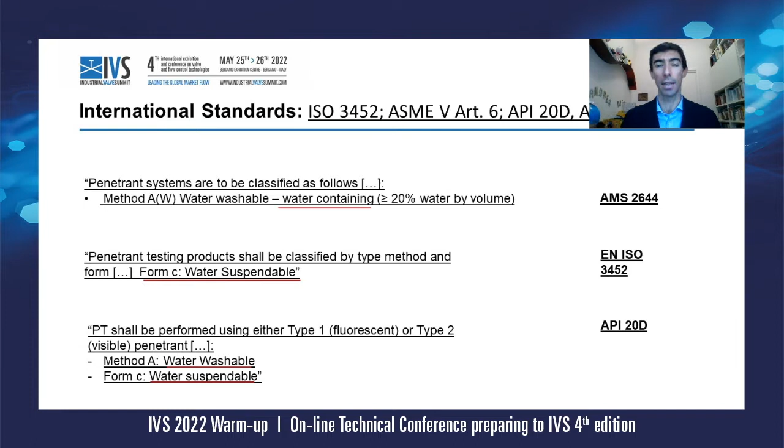Number one, safety advantages. They have no flammability risk. They are not even irritant for the eyes or skin of the operator, and not polluting in any way for the environment. You will see that the safety data sheet and the label are free of any safety indication.

Number two, also very important and appreciated by companies, is 0% volatile organic compounds, which means for you no expensive air treatment with active carbon filtration, and also a safer product for the environment. After the safety advantages, we look at the cost advantages.

Sometimes when we hear bio, we think, yeah, it's a better product, but maybe it's more expensive. No, in this case, bioliquid penetrants are not more expensive to buy, and you also save on the fixed cost of active carbon filtration with solvents, because they are water-based, so you emit no solvent when you spray.

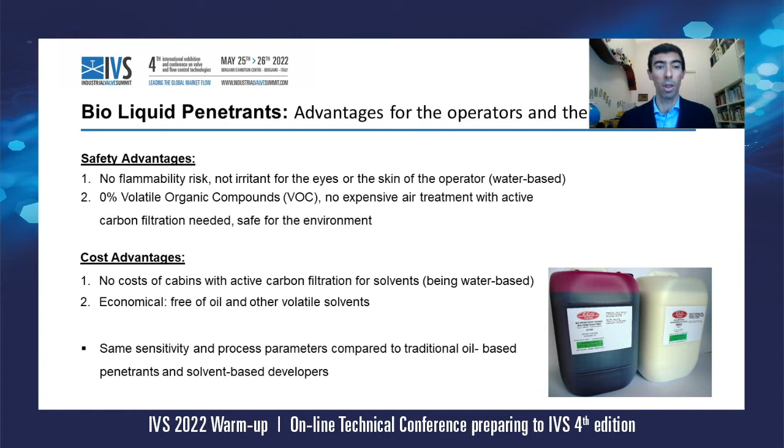This is the big innovation.

So there is no risk of overestimating the size of a crack and maybe throwing away a piece which, by the size of the crack, could be still good for repair or to go further in the production process.

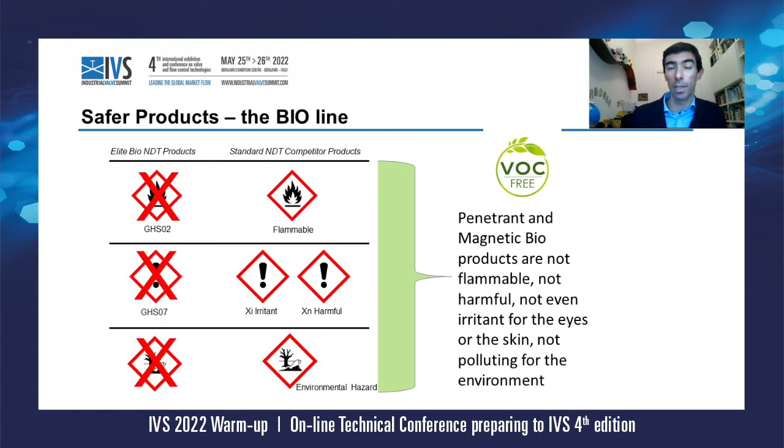So as we've seen, volatile organic compounds — nothing to treat in the air with expensive active carbon filtration, which also costs to replace periodically, like every active carbon, to be sure you're filtering enough the solvents in traditional penetrants.

One slide in case you do magnetic testing instead of liquid penetrants, or together with liquid penetrants, on the part of your production where you use ferromagnetic materials for your valves. In this case, don't worry, there is also a biomagnetic alternative.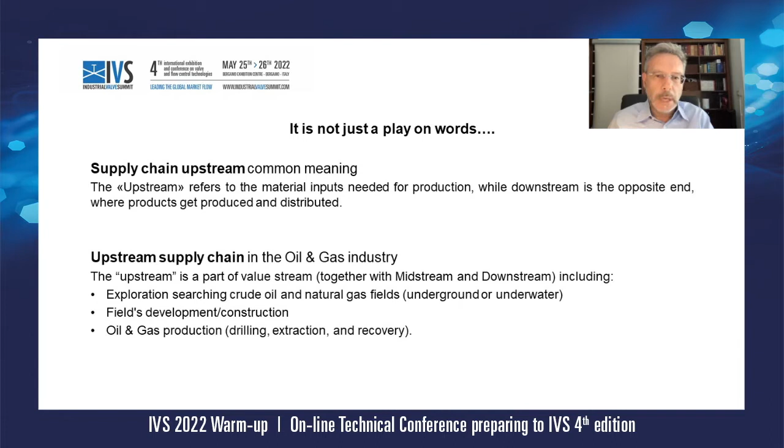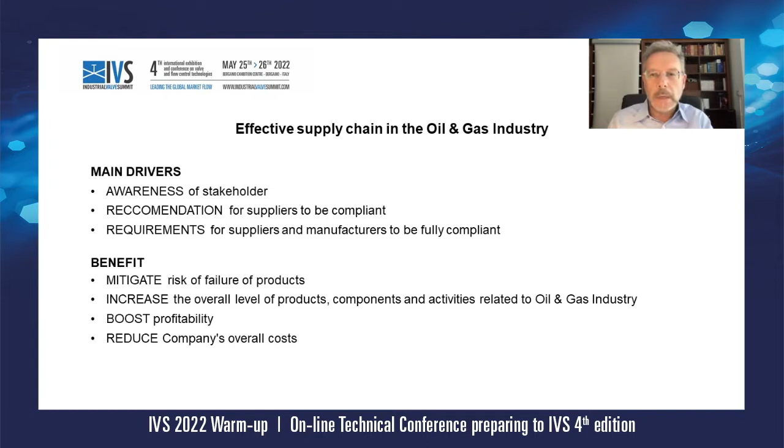Now we will speak about the API CSOEM and SC20. The base for concrete and sustainable development is represented by the activity of standardization of the oil and gas industry, which represents the best practice. Then allow me to introduce you to the American Petroleum Institute, CSOEM, and the Subcommittee 20.

API CSOEM is part of the upstream standard committees. It is the Committee of Standardization of Oilfield Equipment and Material, and supervises the work of subcommittees. Each subcommittee works in a specific area of exploration and production of oilfield equipment.

What does Subcommittee 20 do? API SC20 develops and maintains standards on supply chain management for critical material, products, and processes used in oil and gas, natural gas exploration and production.

API SC20 is in charge of developing the supply chain management. It is the upstream supply chain management, and its scope is to drive development of the upstream oil and gas industry supply chain. Its focus is on the implementation and harmonization of specifications relevant to material, products, and processes deemed critical to safety and reliability of products used in the oil and gas industry, supporting the global supply chain and allowing suppliers, manufacturers, and end users to assess common licensing and/or registrations.

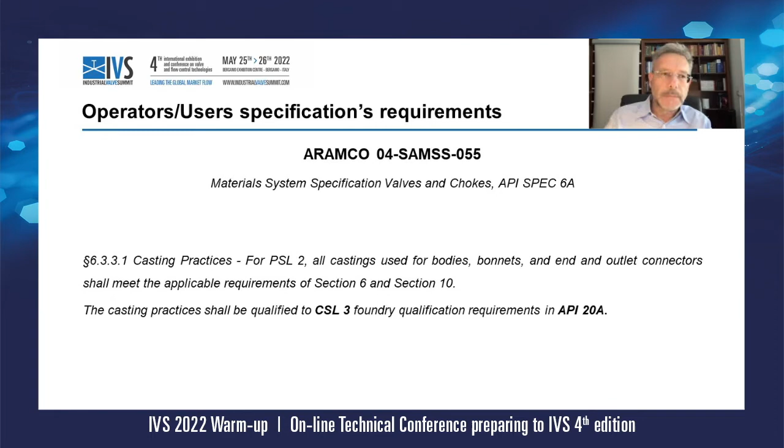The casting practice should be qualified at level CSL3, foundry qualification requirement in API 20A. This is a sample of how this API 20 specification enters into the operators and user specification. Here we have a sample of specification recommendation.

Here again, a recommendation in API 6D specification for pipeline and piping valves. You can see on Annex E, casting may be specified by the purchaser per API 20A at level CSL1, CSL2, CSL3, and CSL4.

Open die forging may be specified by the purchaser per API 20B, FSL1, FSL2, FSL3, FSL4. Closed die forging may be specified by the purchaser per API 20C, according to FSL1, FSL2, FSL3, FSL4, and carbon and alloy steel bolting may be specified by the purchaser as per API 20E at level BSL1, BSL2, or BSL3.

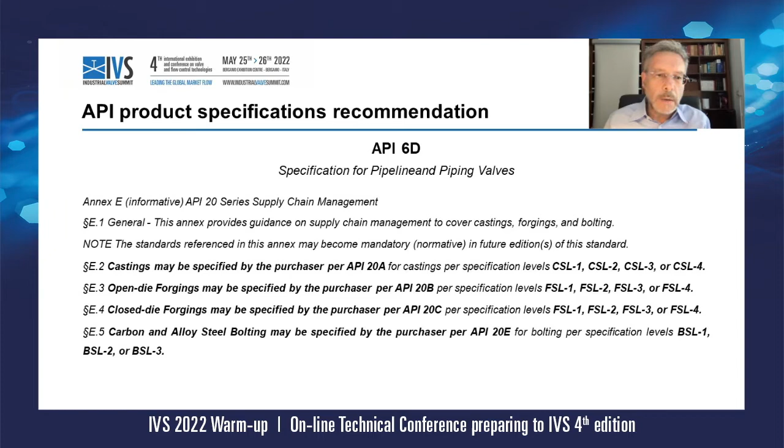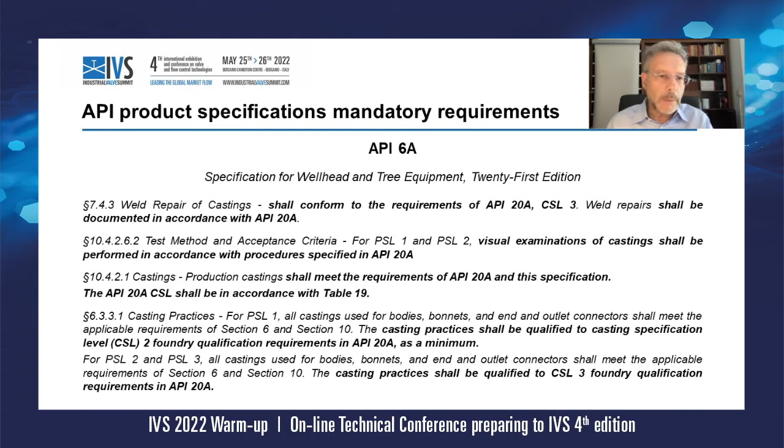Production casting shall meet the requirement of API 20A and this specification. The API 20A CSL shall be in accordance with table 19. Regarding the casting practice, it shall be qualified to casting specification level CSL2, foundry qualification requirement in API 20A as a minimum. For PSL2 and 3, the casting practice shall be qualified to CSL3 foundry qualification requirement in API 20A.

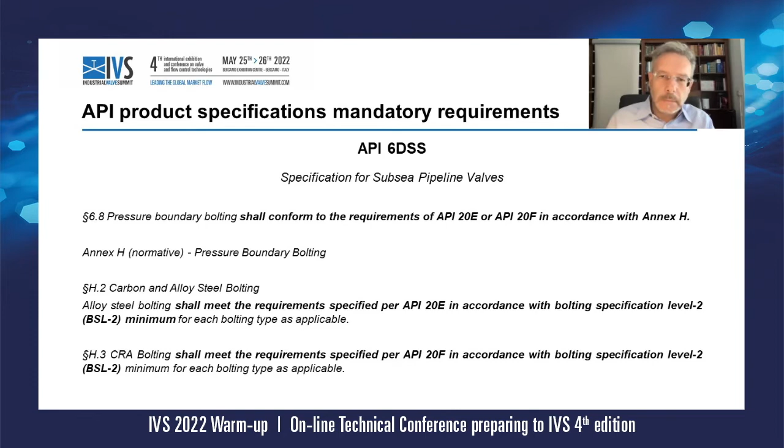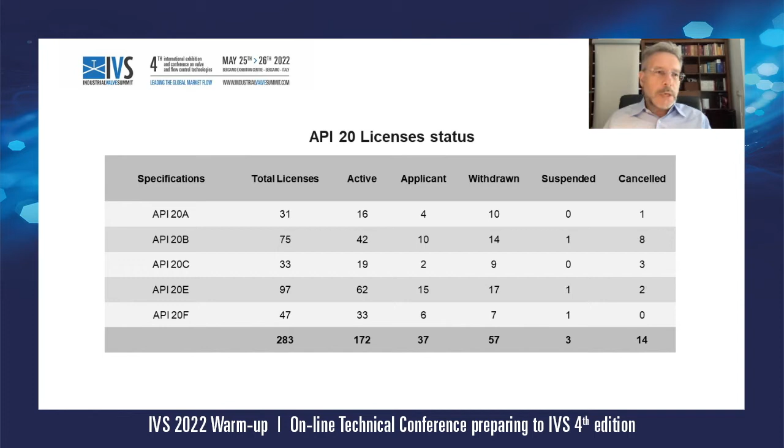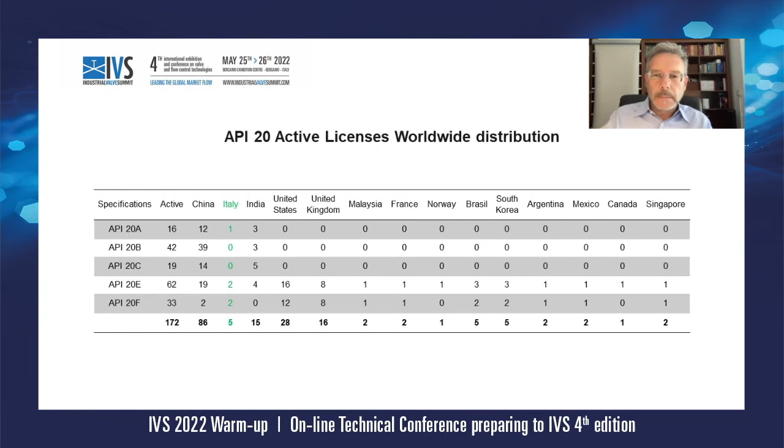For casting, we have specification level expressed by CSL from 1 to 4. For forging, specification level relevant to API 20B and 20C, we have also 4 levels from FSL 1, forging specification level 1, to forging specification level 4, both for API 20B and 20C. For API 20E, we have a bolting specification level, BSL, with 3 levels, BSL 1 to BSL 3. For API 20F, we have 2 levels of bolting specification, BSL 2 and BSL 3. For each standard, we have qualification ranges.

For API 20A, the qualification ranges are based on the casting weight, from 1 to above 4,538 kilograms, in 4 different classes, for each material group from A to E.

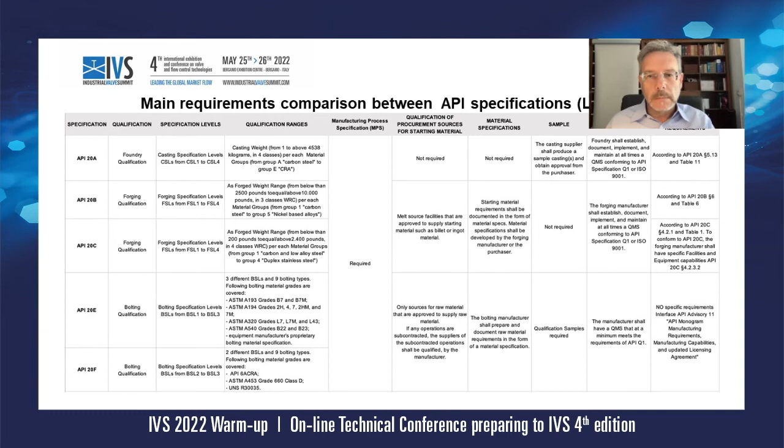Massimiliano, what are the opportunities for companies that would like to implement API 20 specification that are not included into the API monogram program?

This is a reply for the first question. Companies that meet the requirement will get a competitive advantage in the market, making it easier to control suppliers and supply chain for their customers. Companies interested in specifications not covered by the API license program may implement a quality management system according to API Q1 requirements, as well as conforming to the specification they wish to satisfy, and apply for an API Q1 registration. Holding an API Q1 registration allows inclusion into the API composite list, a public register that gives great visibility in the oil and gas market. Achieving API Q1 registration allows a simplified procedure for selection, qualification, and evaluation within the supply chain.

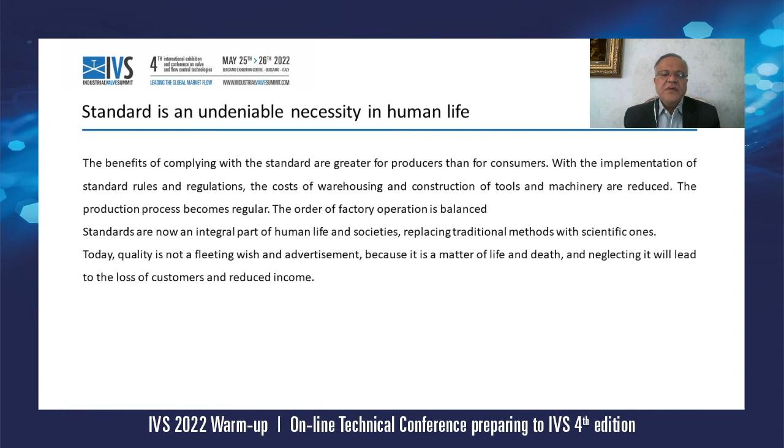Quality is not a fleeting wish and advertisement, because it is a matter of life and death, and neglecting it will lead to the loss of customers and reduced income.

The fourth industrial revolution, or Industry 4.0, is the continuous automation of traditional manufacturing and industrial methods using modern intelligent technology, large-scale machine-to-machine, and Internet of Things communication to enhance automation, improve communication and self-monitoring, and produce intelligent machines that can analyze and diagnose problems without the need for human intervention.

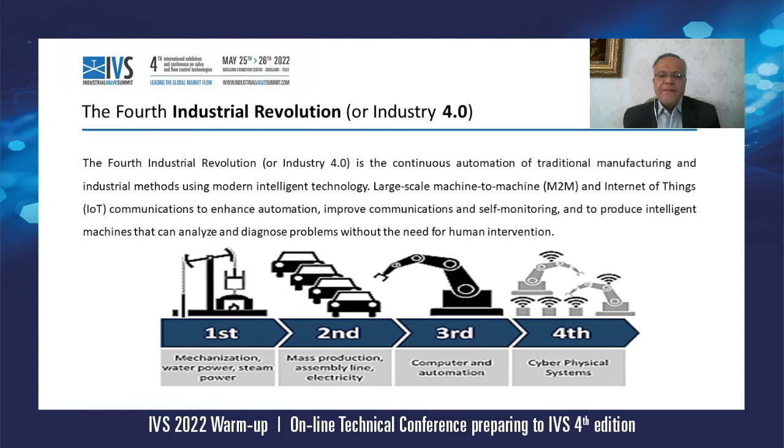The future of standards in Industry 4.0. It is clear to everyone that standards are the basis of engineering, manufacturing, and production in the world. From the beginning of the industrial world, manufacturers and users have been looking for a way to reach an agreement and understanding for a product. This challenge continues today in the fourth industrial age, but the world is undergoing a fundamental transformation in production and services, and this will also affect standards.

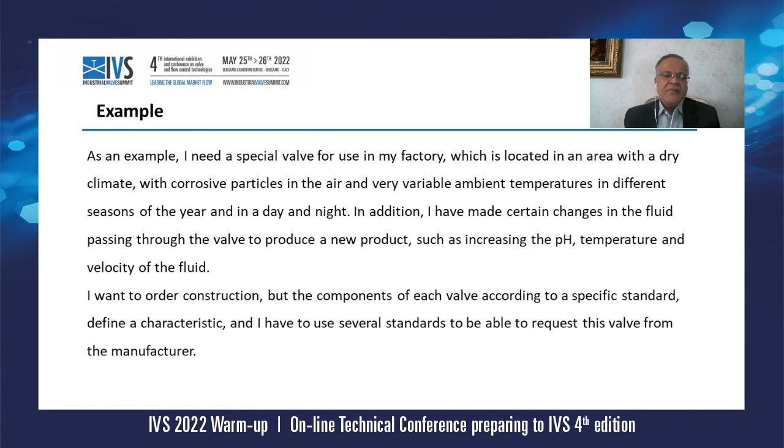In the new business, I refer to the software of the standard service company. After registration, all the parameters necessary for the production of a valve, including the type of liquid, temperature, speed, pH, and environmental conditions such as weather, the possibility of shutdown, and maintenance and other items, we can enter into this software.

Dozens of parameters that may not have been in one valve before. And this software uses its big database to perform the necessary analysis and generate a specific standard for my special valve. The above items can be started through the manufacturer according to the customer order.

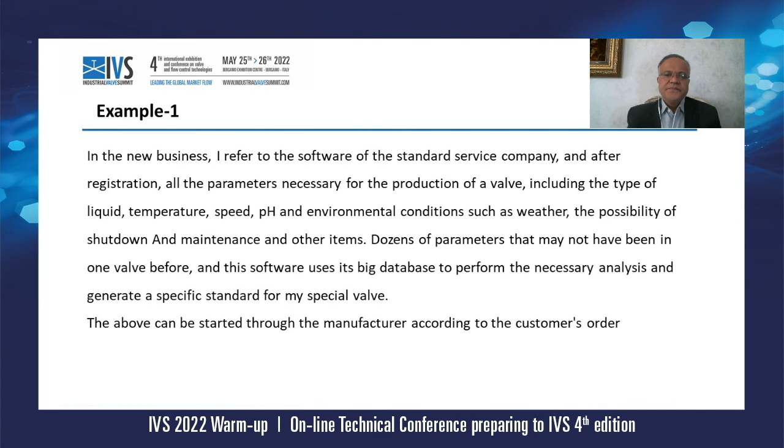With the guidance of startup and knowledge-based companies and software companies, and the use of data centers of national standard organizations and procedures, producers and users of the standards, including major industries such as steel, mining, oil and gas, food, medicine, and agriculture, and other sectors, integrated and made available to startups and software companies to form this new industry called special standard production.